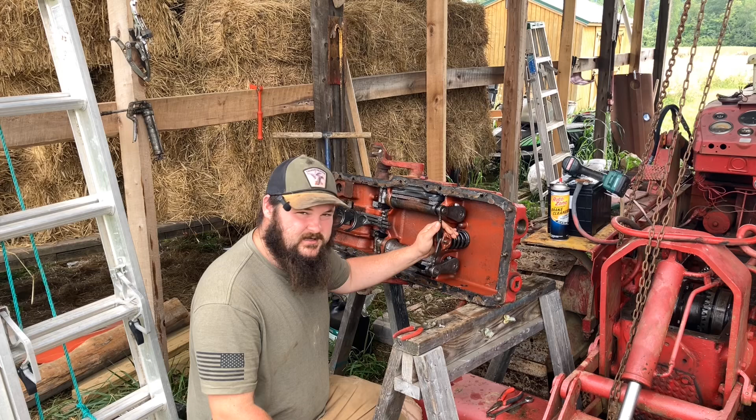So I've got what I call the top plate sitting behind me here. If y'all watched the last video, we took this off and I had to fix something. I'll show you what I did to fix that. I didn't do it on camera, but anyway, guys, I'll bring y'all in closer and show you what I did.

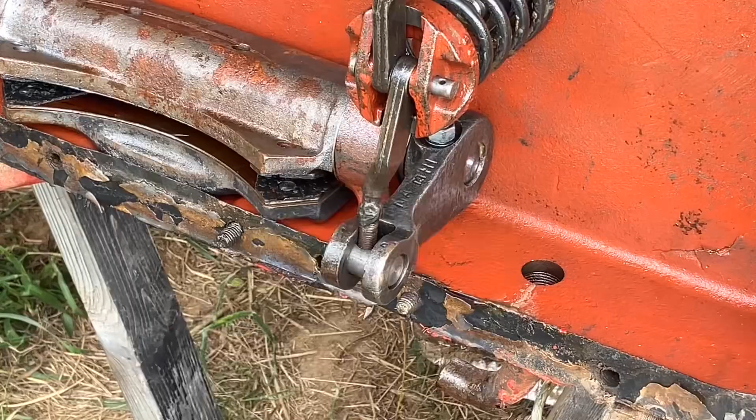All right, guys. So if you see right here, this piece was broke. I think I showed that in the last video. What I did is I ground it down and I welded that back. I think it'll hold, guys. I got a good weld on it, plenty of penetration, and I let it cool down naturally, so it shouldn't be brittle.

But what I'm going to do, guys, I'm going to put it back together. I'm going to keep looking for one of these and just have one on standby just in case it does break. Or I may go ahead and replace it later on, but let's start getting everything ready and see if we can't get this rascal back together.

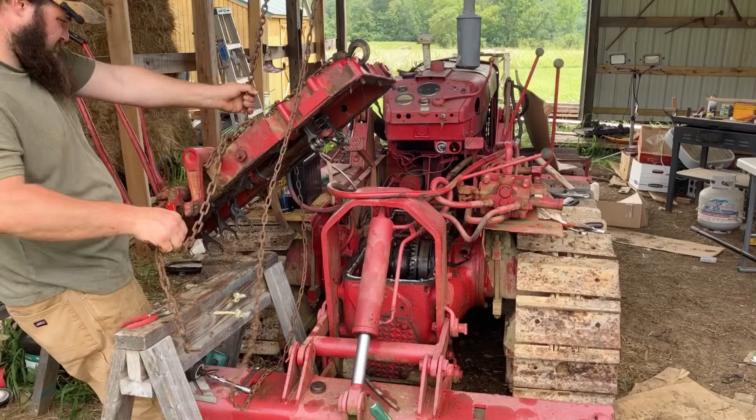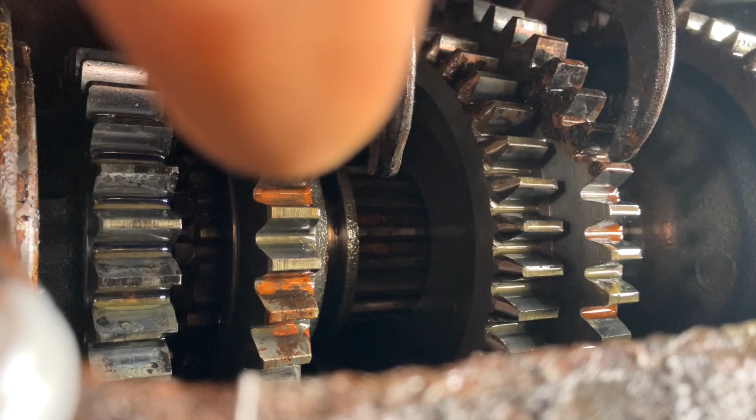Alright, guys, I'm going to try to get where y'all can see this. Alright, you'll see those forks. They've got to line up with those grooves right there. And then come around back. That in between those shoes has got to go over these discs. I'm trying to let it down real slow.

There's also a brake control on either side that I gotta slide into. Okay. I've already got one off. Oop, wrong way. There you go.

So what I'm doing, guys, trying to move those forks to where they match up with, well, I'm trying to move the transmission rather, gears, where they match up with those forks. That way I can drop it down.

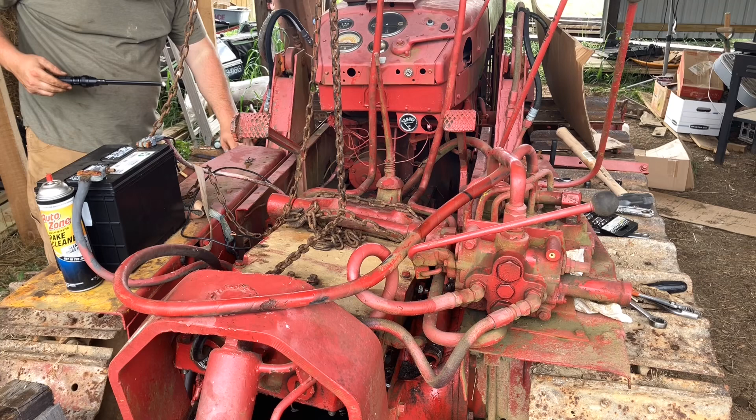There. Okay, there's that. Now we've lost sight of the forks. I think they're in there. Real gentle. Alright, guys, I got the plate set down. I'm going to come in from the top and see if I can't see if those forks are in the right spot.

Take these long ones out. Okay, I might be able to see down in there. Ah, man. All right, folks, so the middle one is not where it needs to be. And I can't see the front thread. All right, we're going to have to raise it back up and line that up. I know it didn't feel right.

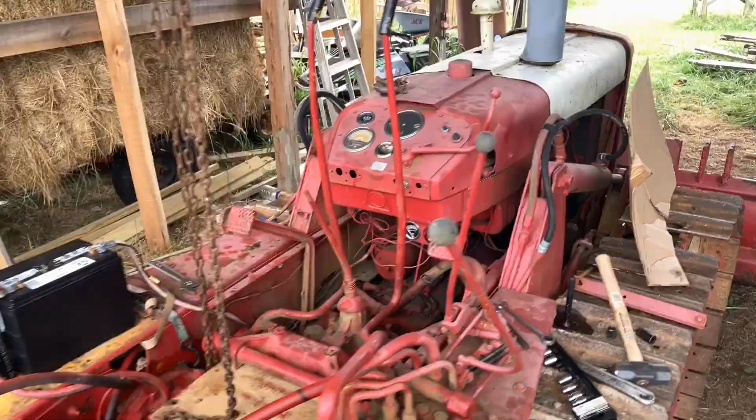So, handy dandy light. That one's in, and we're good. All right. And we'll bolt this back down. All right. Before I forget, go ahead and put this hydraulic cap back on. I'm going to set you up on a time lapse while I do this part. It's going to be pretty boring. I'm just going to be spinning bolts in.

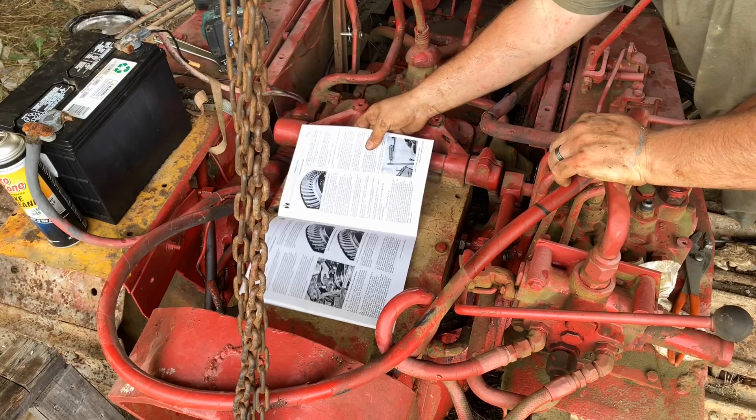All right, guys. Now we're going to adjust the tension on these clutch shoes, I guess. What it says to do is to pull the lever all the way back. And then turn this in all the way, finger tight. I'm probably blocking y'all's view right now.

Okay. It's finger tight. And back out a quarter turn. And release it. And that's probably 1.5 inches. This side is no bueno. Now what we got to do, got to hold that one we turned, and there's a lock on it. Turn that lock down. When we get done, I'll bring you in here and show you what I'm doing.

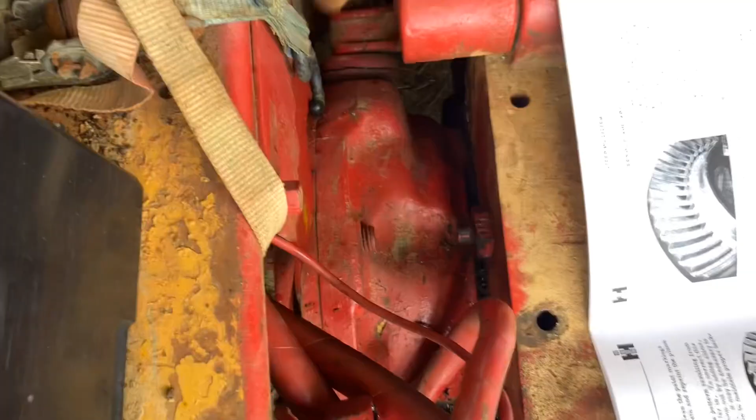All right, guys, see right here, you turn this in. This is the lock. That's the same way on the other side. Now, we're going to adjust this center bolt to where it's 30 pounds of pressure on the arms. And guys, remember, I always encourage everybody to get a manual for what they're working on. Counterclockwise increases the pounds, clockwise will decrease. We want 30 pounds on this. I'll need a 9/16, I believe.

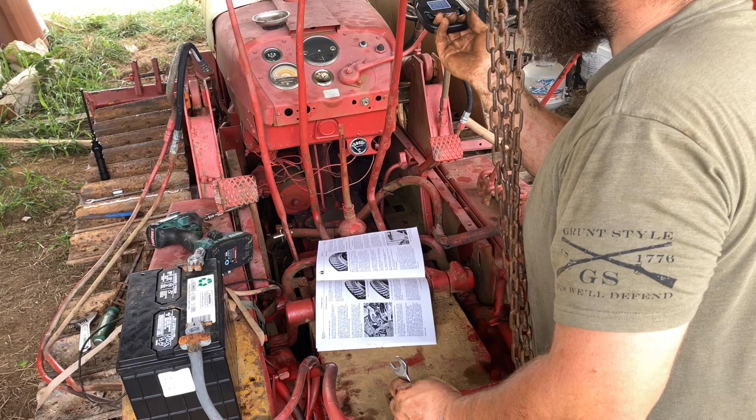Guys, I just bought kind of like a fish scale. There you go. And that'll tell me my pounds on the lever. We're gonna hook it there. 27. Counterclockwise increases. So it's right about 30. All right, guys, we're about ready to fire it up.

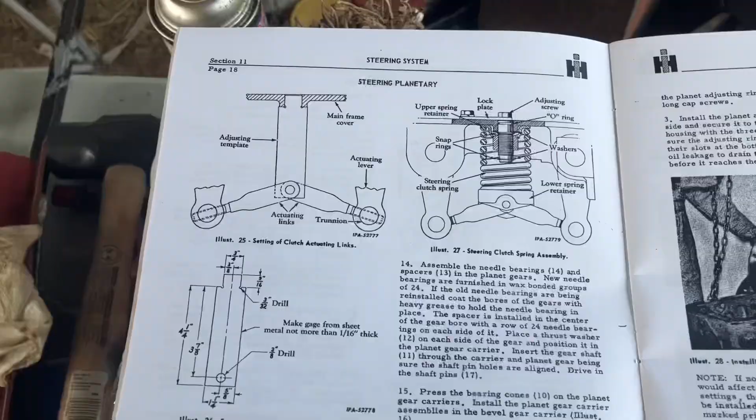All right, guys, it's actually a week later. I know what I did wrong. If you'll notice right here, it says snap rings and washers. I didn't do either one of those because they weren't on there when I took it apart, so I didn't even know they needed to be there. I'm always preaching about using a manual, but sometimes I struggle with it myself, guys.

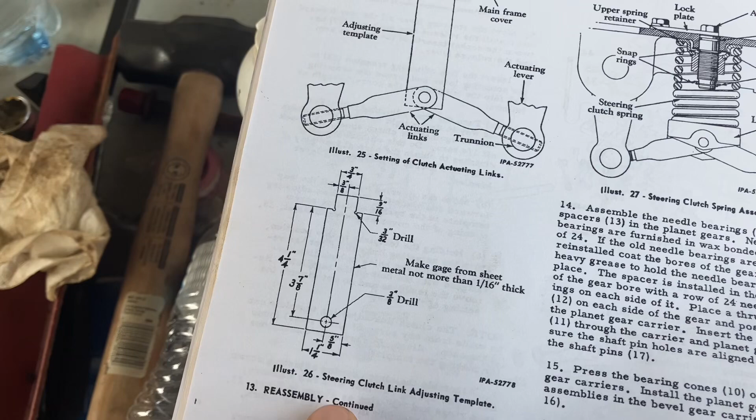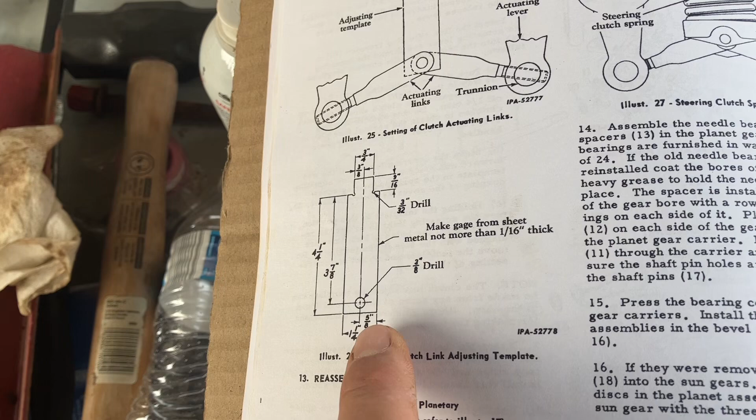Now, another thing I want to do, they give you the dimensions here. I guess y'all can see that. To set the actuating links, you can see there. I'm trying to give you all a good view of everything. So we're going to take it apart. I'm going to make one of these, and then we'll put snap rings and washers in.

And Jonathan will actually be joining us today. I guess he saw that I couldn't do it right the first time, so he's going to come and supervise me. But anyway, stay tuned.

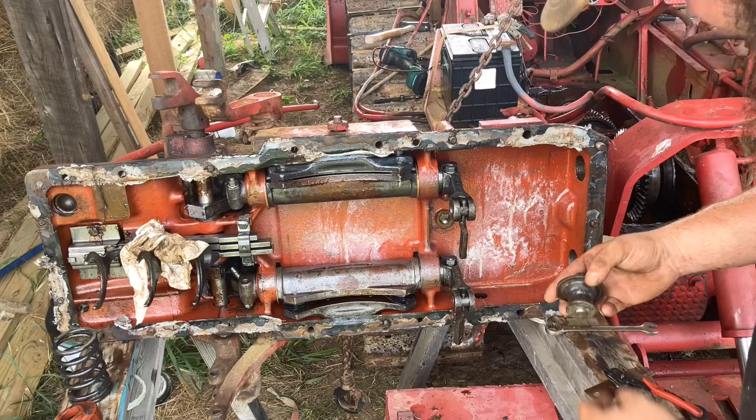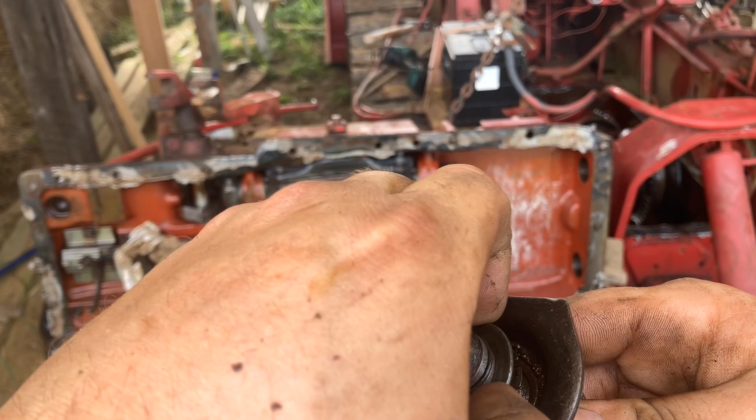All right, folks. So, get where y'all can see this. The snap ring and this washer was not on here. That's why I had to pull this back off. And then this snap ring and washer actually was on there. So that worked out. This goes back in here. Be smarter than what you're working with.

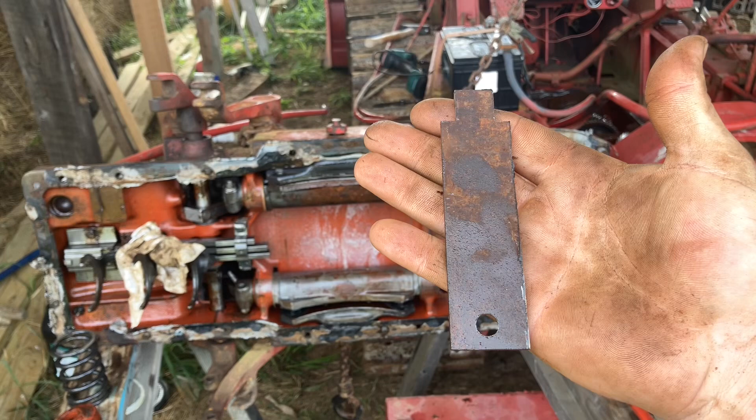I'll show the folks this. I showed you on the book, I made this little piece to set those arms right there. So we've got those set. Now we're gonna put everything back together. And guys, I didn't show us taking the top off because you already saw that once. I didn't want to bore you. And I'm not going to show y'all putting it back on. Y'all already seen that once.

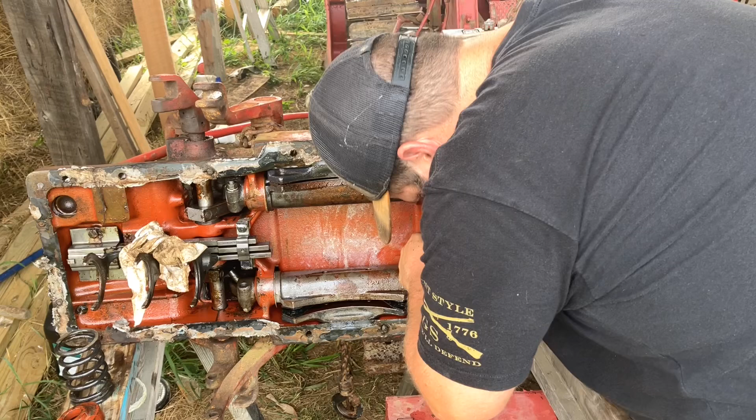Jonathan. Supposed to say I'm not going to bore you. Never mind, forget it. I'm not going to bore you. It's too late. The moment's gone. And I need a mallet.

Alright. So now, what I got to do is back the tension off of this so I can put the spring back in there and help you go the right way. Think it's got it. Put our cotter pin back in.

And y'all can't see him, but Jonathan's hiding behind the camera. He's my official cameraman today, I guess.

Guys, I'd say y'all probably all know how to do a cotter pin, so there you go. All right. So guys, how these things work, y'all seen those two discs in the transmission. These actually hold those discs, and as long as they're holding, that planetary drives. And once you pull the lever, this shaft through here is actually offset. It will open that up and allow that disc to slip so that one side slips.